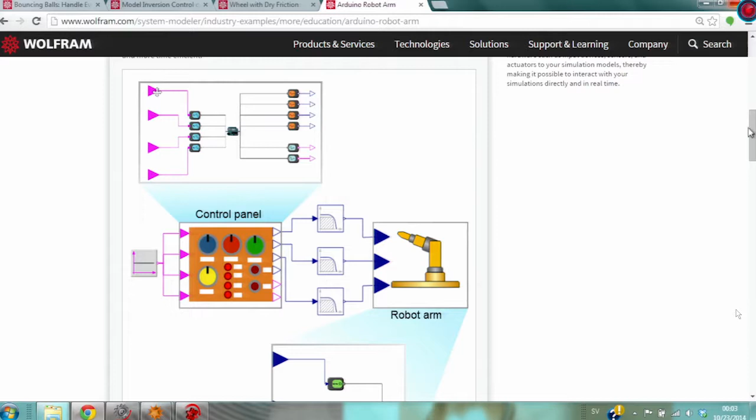It's a library for connecting to Arduino. Since you asked for robots, I think this has some relevance, even though you asked for a different type of robot. This is an example of how you would use the Model Plug library, where in SystemModeler you build up a system with a control panel, a robot arm, and some filters to get a smoother drive of the system. At the end, what you have is a system where you connect a simulation model with a robot arm.

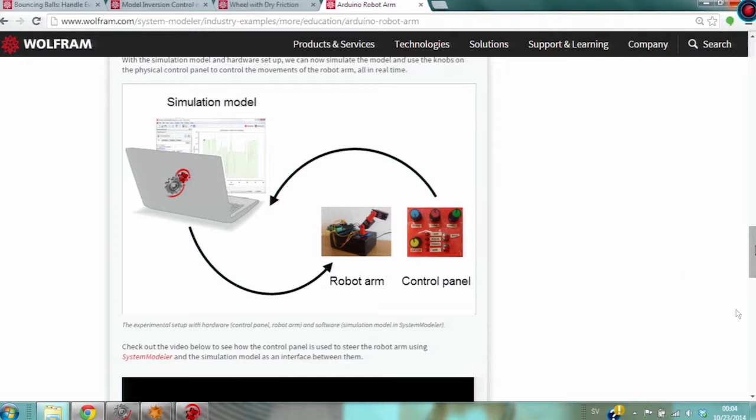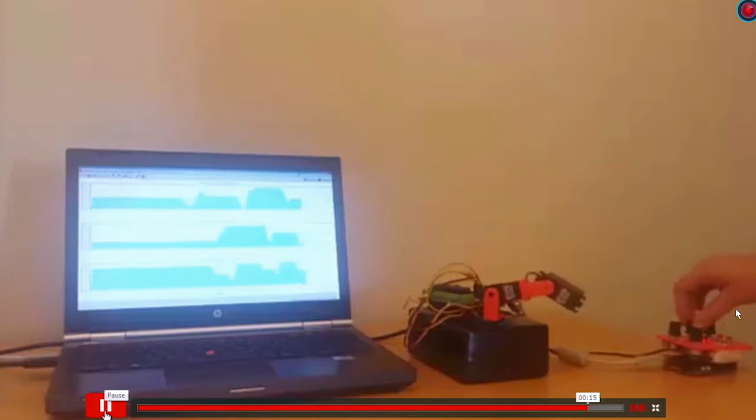You have an input from the control panel, it goes to the simulation, and returns to the robot arm. If we look at that, it will look something like this: you have a connection where you use the model, with the library completely drag and drop, built together to connect to the Arduino board and communicate with the system. So you don't have to do any programming at all - you just use a drag and drop library, just as with the hydraulic library or the mechanical library, then plug in your Arduino board and it runs.

That came today, so I don't have a slide prepared for that - that was extra information, but the connectivity session will discuss more about that.

One important thing we added is the hydraulic library. It applies to a lot of different domains - heavy equipment is probably the one you'd most likely think of, but aircraft, automotive, robotics, and so on are all systems heavily dependent on hydraulic systems. The library contains components like valves, cylinders, and so on.

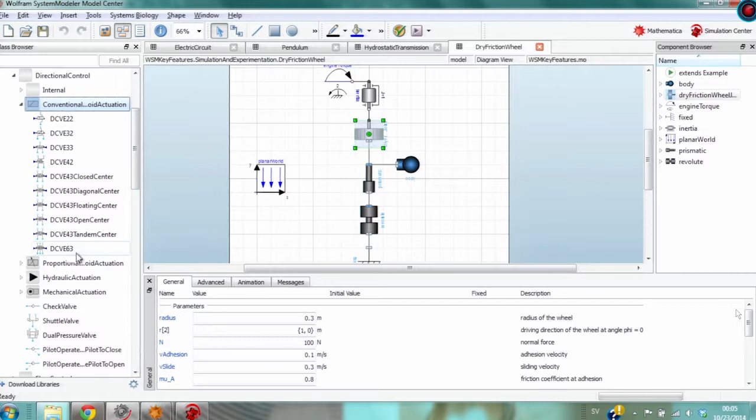If I look at the library - you already saw an example - it has different valves. I can open valves and see the directional control valves of different types, like conventional solenoid actuation valves, proportional actuated valves, and so on. We have all these different components, and you can use those to build up a system like a cylinder motion system.

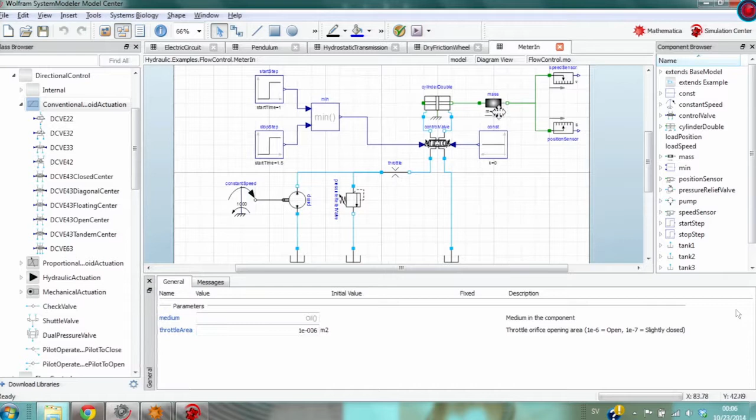If we look at the hydraulic library system, it will look like this: we have a pump driving at a constant speed, which drives a valve, and depending on how we control the valve with input signals, it will be in different positions to do different operations. We have a pressure relief valve and so on, and at the end, what we activate is a mass that we try to move back and forth.

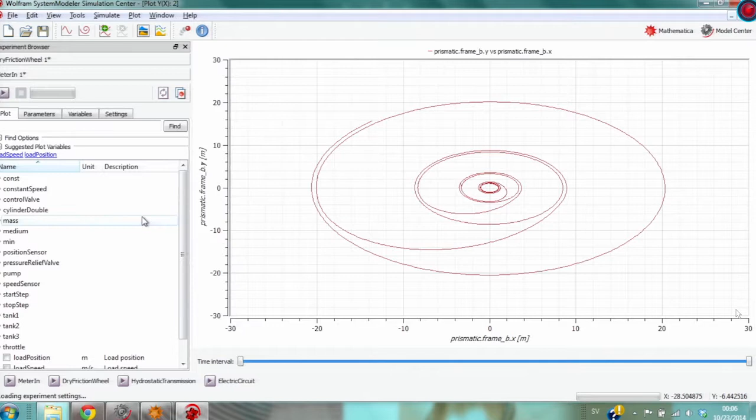When you have this kind of system, it works just the same way as any other SystemModeler model - I simulate that and have access to all the components, like the position sensor, so I can open the position sensor and see the position of the mass, how it's moving.

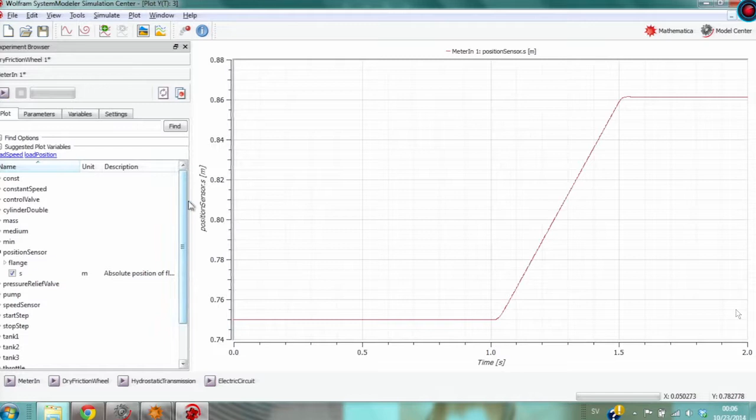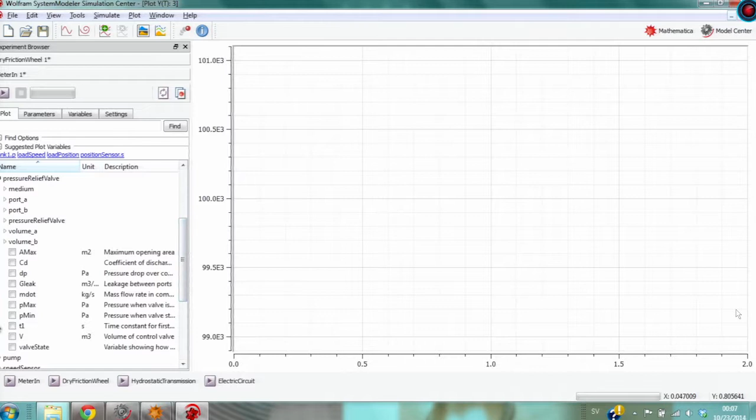Or I can go look at the load position - well, that was the same as the load speed. Or I can go into any of the tanks and look at the pressure - well that was boring, the tank will have a constant pressure in this case. But I can go to the pressure relief valve and look at the leakage, pressure, mass flow, and so on. So I have access to all these variables, and I can connect it, as you saw, to other systems.

We also added a smart cooling library. This, just as a hydraulic library, is a commercial library, a paid library that you have to pay extra for. But this is used to model cooling systems, especially in automotive applications. So if you want to model, for instance, cooling fans or water pumps, these are included in this library. This library, by the way, is developed by a third party, the Austrian Institute of Technology.

So if you're interested in developing and deploying your own libraries, you can do that through the library store now. Users will be able to buy them, or if you provide it for free, download them for free, and then install them automatically to SystemModeler.

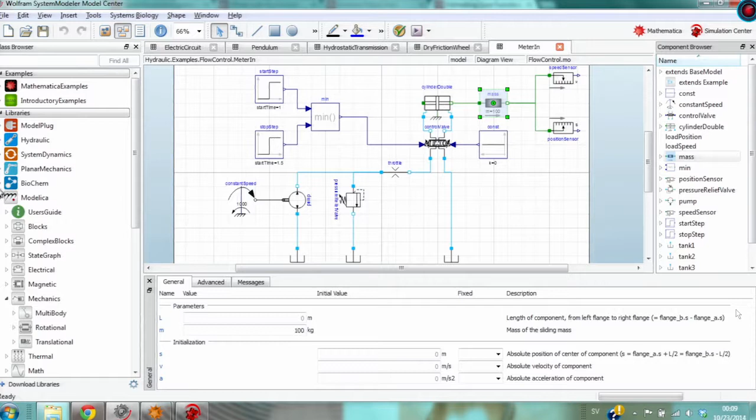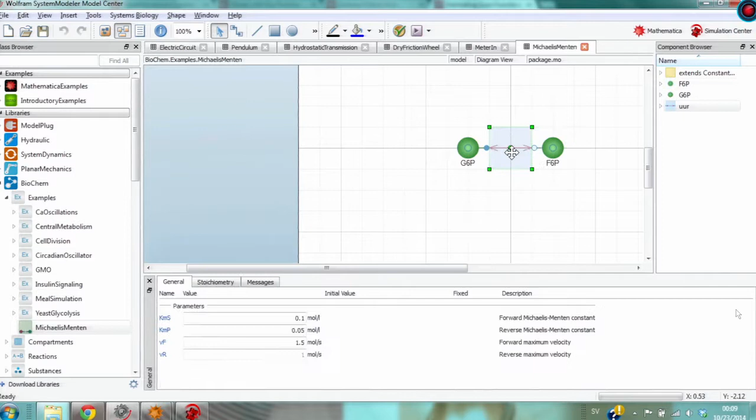A library that was available from before, so I won't really go into detail, is the Biochem library. This model here, the Biochem library basically enables you to do, let's show a very simple example first. Simple pathways that are Biochem examples. This is the simplest possible biochemical pathway. Two compounds, glucose 6-phosphate and fructose 6-phosphate, that are connected with some reaction here that has some kind of parameters governing the reaction.

Basically what we simulated here is the transfer from one to the other, and the mass balance between these two. As you go, you develop more complex systems like the metabolic system, which has a lot of these compounds. You can also then add, so in these we have the liver, we have the cardiovascular system, and we have the blood plasma. Each of those have those kinds of pathways that are interconnected to each other.

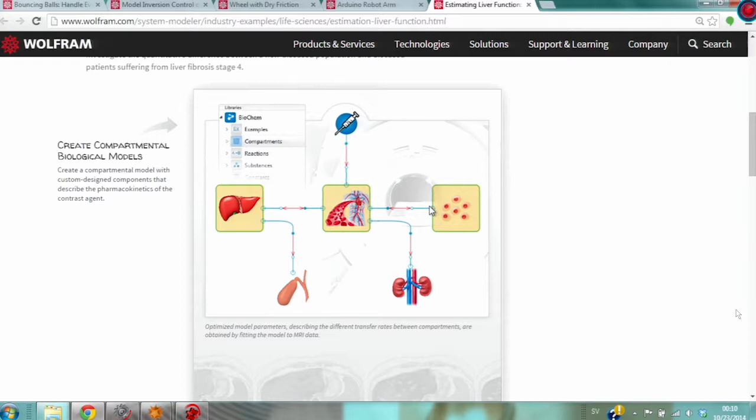And we can do experiments. In this case, we have contrast agent that we inject, and we want to see how contrast agent transfers through the body. We can get something like this where we will see a variation. We do simulation with different inputs, and we'll get different outputs on the level of contrast agent in different parts of the body.

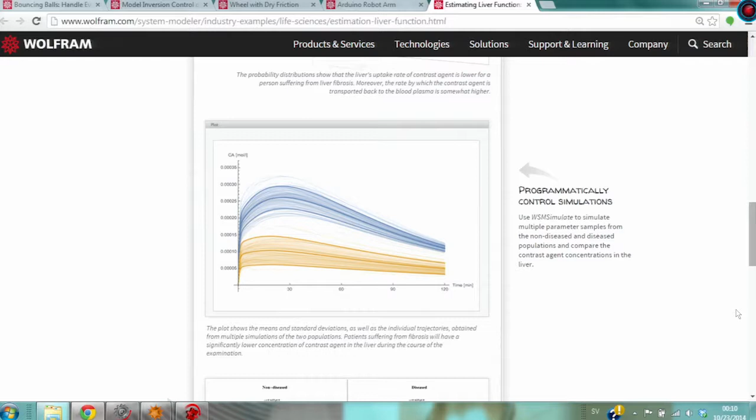But you can also do, and as I saw this, I hadn't planned this, but this is actually an interesting new feature of SystemModeler, where you can see dynamic diagrams. So this is when you combine Mathematica and SystemModeler: the diagram you saw, that's the diagram as dragged and dropped in SystemModeler, but we've added, now from Mathematica, you can automatically get these kinds of arrows that show the flow of contrast agent in this case, between different compartments as the simulation goes on.

And it's two different simulations, one from a healthy patient and one from someone with a disease. So if I repeat that, you can see we are entering the infusion there in the beginning, and we can compare how these two behave differently. So now we can use this to understand how a healthy patient transports contrast agent compared to a diseased patient.

And if I have time, I might show a little bit larger example later on.

There's a planar mechanics library also added, which, like Biochem, is a free library. You can download that. It's primarily for didactical purposes, so for education, you can use that to do things like a Newton's cradle or similar things. The wheel that I showed in the previous presentation was done with the planar mechanics library. So that's one example.

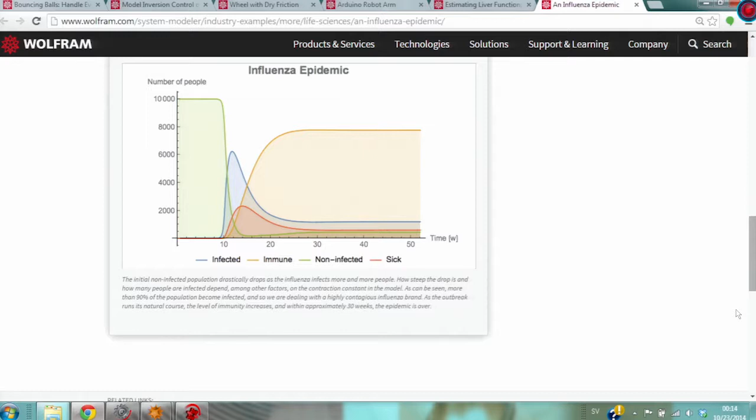So in this way, you can use the model to study what happens if we try to stop the influenza from spreading in this occasion or that part. How can we best prevent an epidemic or even more a pandemic situation?

So that's the kind of things you do with the system dynamics library.

We have added a lot of help, and the help system has been vastly improved. We added a documentation center where everything is gathered together. For instance, if you want to get started, you click on Get Started, and it looks similar to Mathematica's documentation center, where you will have introductory videos, tutorials, and so on.

And if we go to the question of how are the components documented, we can go to the mechanical system here, look at the rotational library, and each library has documentation like this, where you can find, let's look at a component like an inertia here.

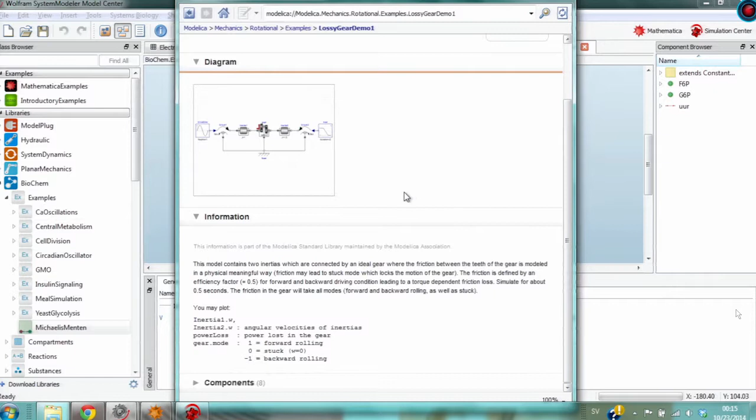If I click on that, I will get a list of different features I could look at. For instance, I can see examples in which it's used in order to understand its uses. It automatically lists all examples where it's used, and I can click into an example, learn more of how it's set up, what are the results. I can open the example, simulate it, and try it that way.

So everything is cross-linked and put together so you can start from an example and find the different components, or start from a component and find examples that correspond to it, showing you how to use it. This is also available from reference.wolfram.com, so you can see the whole documentation from there, and that goes for the built-in libraries and everything else too.

I will not talk too much about this, as there is a separate session for that. Connectivity and deployment is a really important part that we added to SystemModeler, and that's why it has a separate session. But basically, it's a way to do things like connecting input devices.

So sometimes I'm bringing a quadricopter with me, or a gamepad, and then I have a quadricopter modeled in the simulation center, and I use the gamepad and can control it and drive the simulation from that. So that's one thing you might want to do.

Another thing is going the other way around, when you want to drive a physical system from the model. Then you can do that, for instance, by TCP-based communication, which is standardized and set.

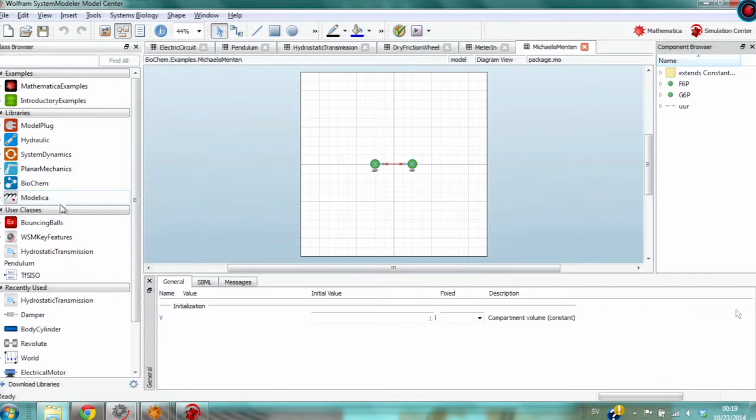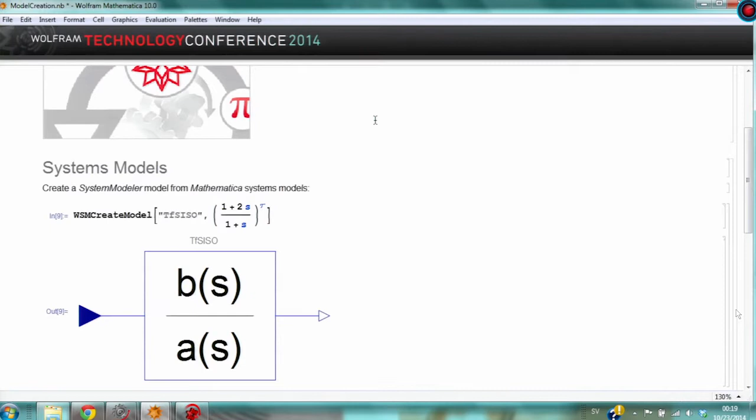It kind of doesn't make any sense to use this probably in the Biochem pathway here. But in that way, I can start creating my own components from Mathematica. It could be based on equations also.

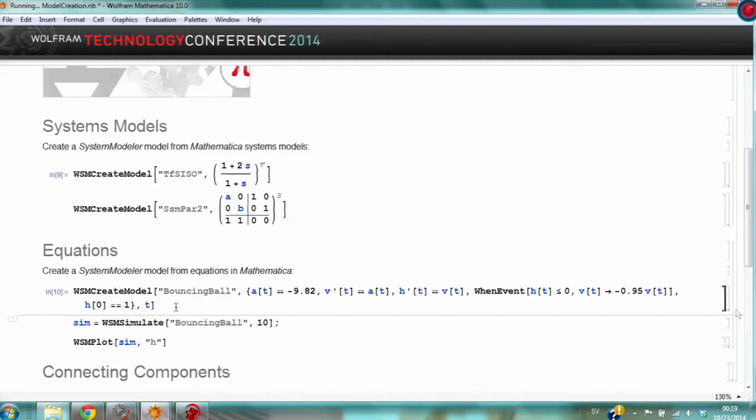So I could say, like creating a bouncing ball model with typical Mathematica equations, adding events, setting initial equations and so on. And I can create that - I will get that up here, what was the name? Bouncing ball. I get that to my model here, but I can also simulate that from within Mathematica just as any other simulation or model.

But more importantly, what you can do is from within Mathematica, rather than using the graphical drag and drop way to connect, sometimes it makes sense to programmatically create your models. And now you can use WSMConnectComponents to do connections. So we'll create something called AbsSine here.

And we have a list of components. One component called A, which is of the class Abs. One sine, which is of the class Sine. And these classes are Modelica classes from the libraries within the Modelica standard library. And then we say some connections that we want to connect: sine.y with a.u. That's the two things we want to do when we create this model.

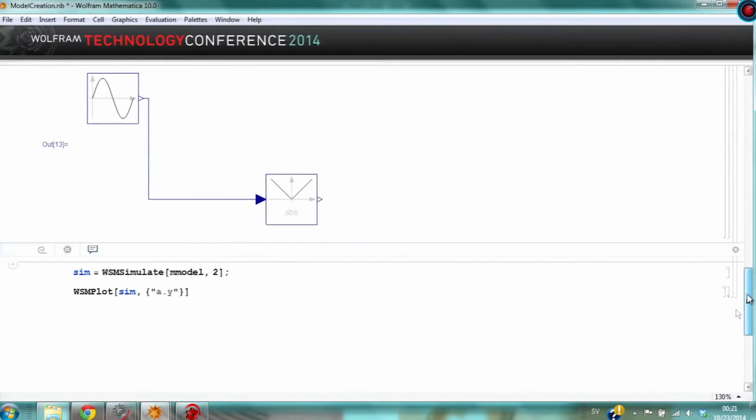So this is a Mathematica command. And you might wonder with this simple example, why would I like to do this? Okay, this would have been faster to connect in the graphical user interface, of course. But suppose you have, let's say, an electrical system where you have different types of electrical resistors with different behaviors, like faulty behaviors and so on.

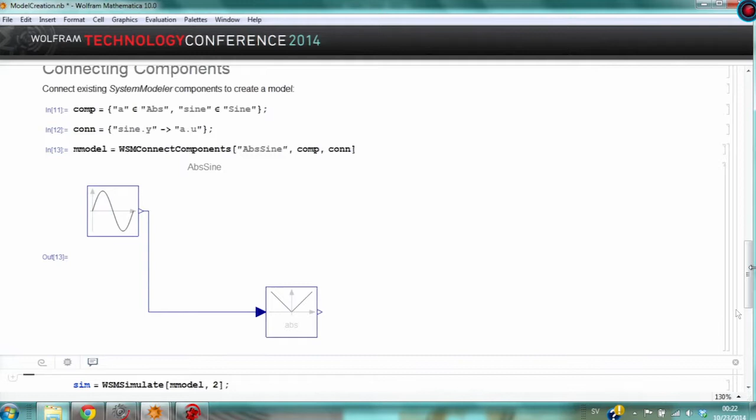And you want to build a huge set of different models where you will use this faulty resistor in different combinations at different places. Then you can generate all these programmatically to get a table of models from within Mathematica, rather than having to connect each and every one of them by hand. So you can get a huge amount of models that you can simulate and then test the behavior. And

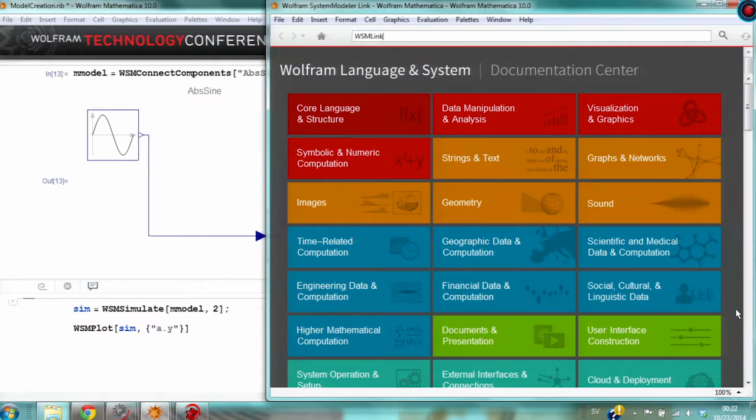No, I don't think so, but I actually don't know. Yuan? No? Does it work on the Raspberry?

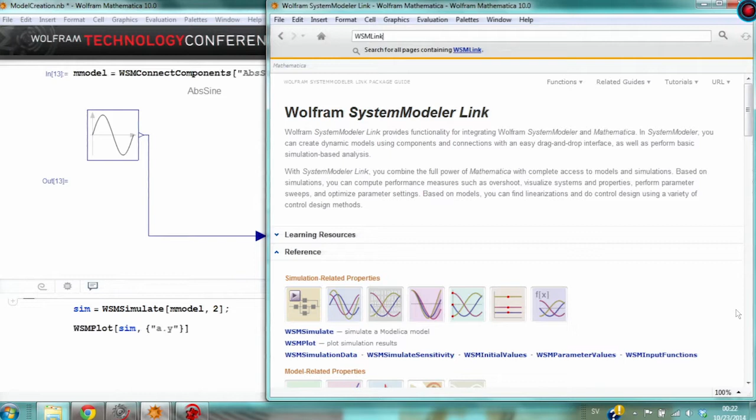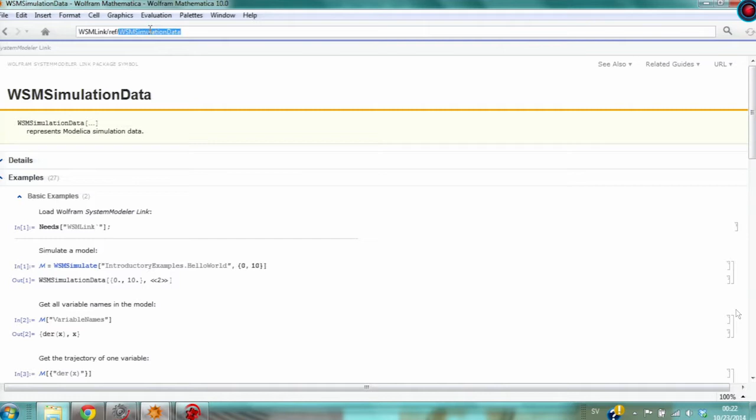So you asked about how do I get equations into Mathematica. So there's a function here. We can query the model, WSMModelData, I guess, rather. So I went to the help. The help from within Mathematica works the same way as any other Mathematica help, of course.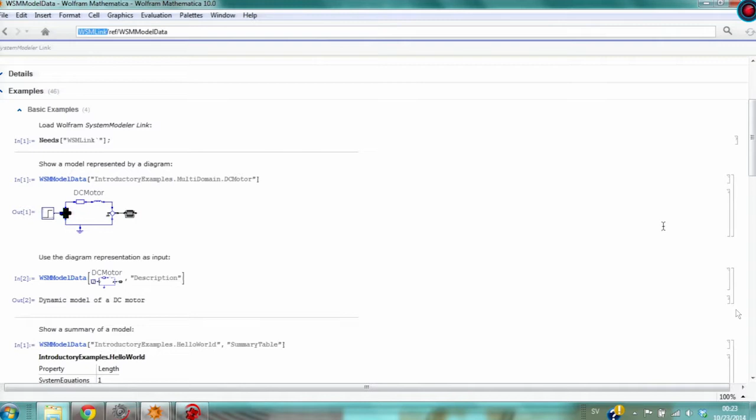So I have the different functions here, and I can find WSMModelData. And from WSMModelData, I can query things like, give me the diagram. There should be an example of system equations here, I guess. Yeah. So you ask for the model name and system equations, and you will get those into Mathematica. And then you can start manipulating this in Mathematica. There are several examples online where you can download examples and try it out.

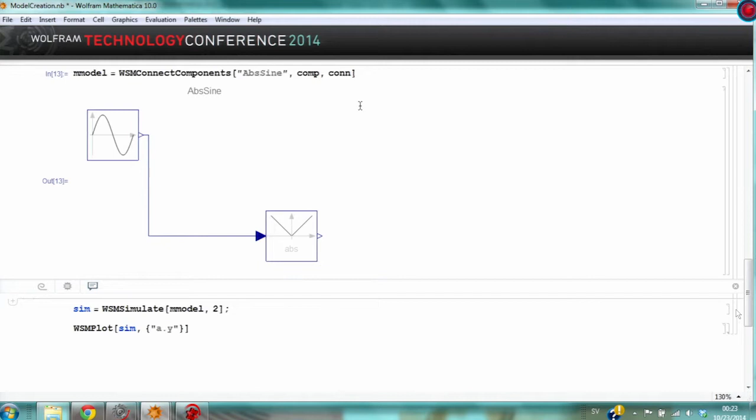Would you have an example for a hydraulic system? Where can I download that? I don't have that prepared, but we can look at that afterwards if you like. Yeah, sure. Because I have, I think, 2 minutes left. Don't say that.

So, what is new? This is a very fast go-through of a selection of what's new, trying to lift it up to a higher level. The first is expanding the scope, so adding built-in libraries. I didn't really show examples of that, but the digital library, quasi-stationary library, additional functionality to the rotational and translational libraries, and so on. I focused quite a lot on the new add-on libraries that add functionality, among those the hydraulic library.

There are also things that make it easier to get started, by adding the documentation center. Yet again, a very quick go-through, but it's a very important way to gather things together in a more structured way than in the previous version. There are also a lot of small improvements in Model Center and Simulation Center to make it easier, for instance, how to structure parameters and so on. Connectivity, there will be a separate presentation on that. I'll get back to those in the last slide. And

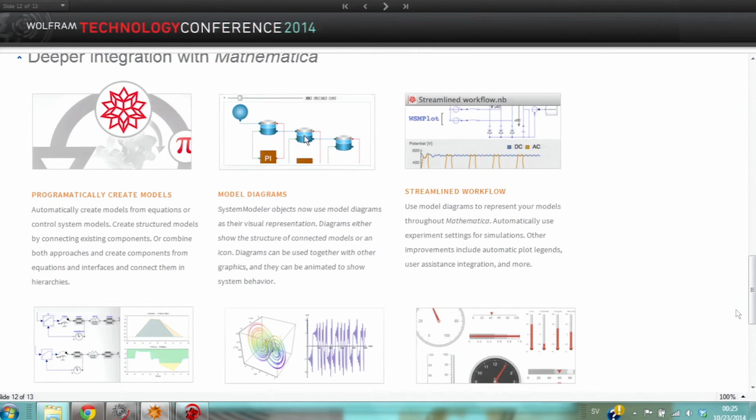finally, a lot deeper integration with Mathematica, where I quickly showed, for instance, the dynamic diagrams, where you have tanks with levels that go up and down rather than looking at a plot. There is the programmatic creation of models. But also, we have made sure that it's easier to use other built-in functionality within Mathematica, including Mathematica 10, like using the gauges to visualize your system more directly. There are enhanced control system capabilities in Mathematica, and we'll also make that easier to use together with SystemModeler and so on.